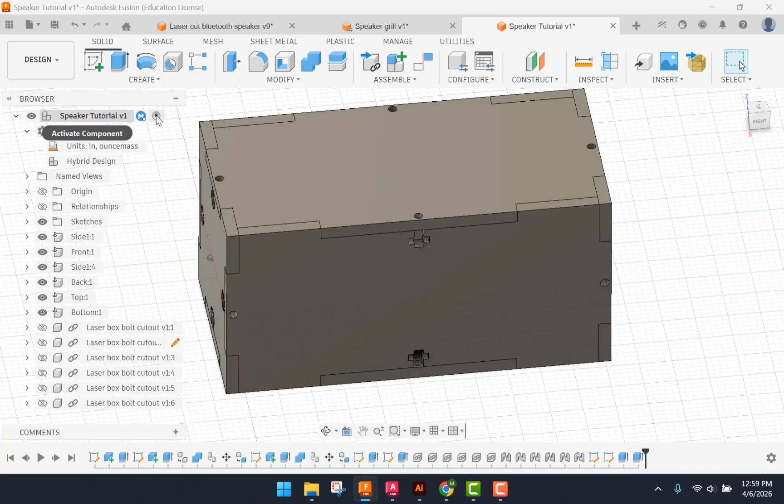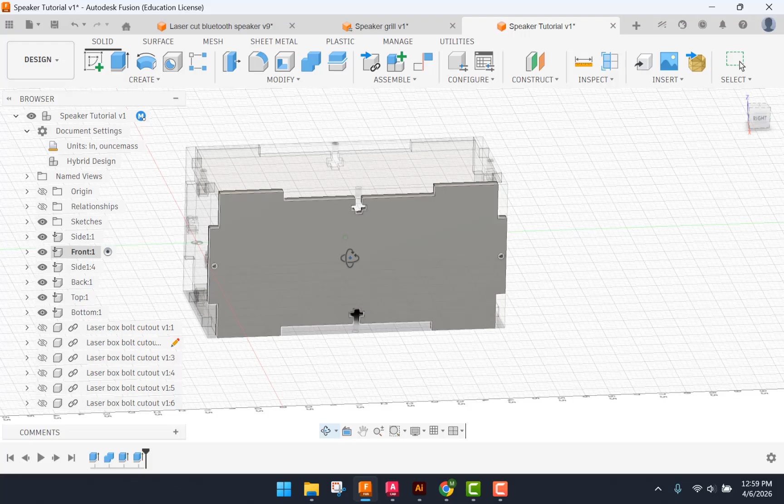One thing you want to know how to do for sure is how to activate one component and how to go back to the main component. There will be these dots here on the side of any of your components. If you want to work just in that one, I would recommend opening or activating that component. Once you're done, go back up here to reactivate the main file.

First thing I want to do is on the front, start a sketch. I'm going to do the circle and the hole cutout for the speaker.

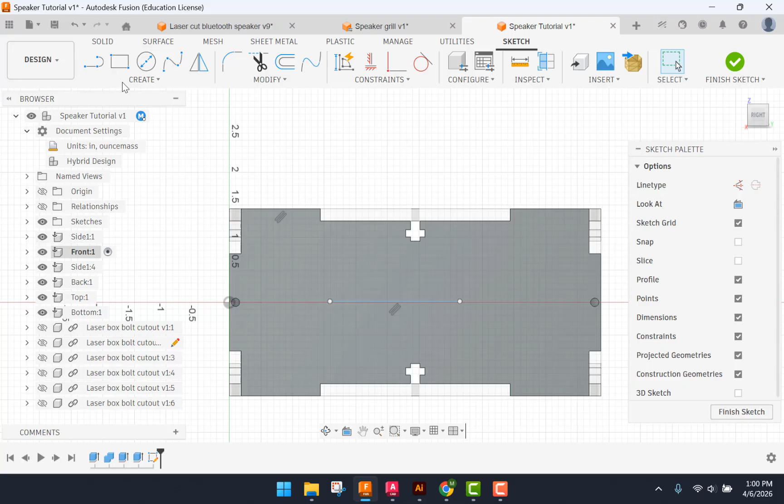To start, I'll go ahead and put a line across the middle, and I will put a line from the midpoint to the midpoint of that line. If I make this line vertical, it should make it so that this line is symmetrical about the middle. That's why I did that.

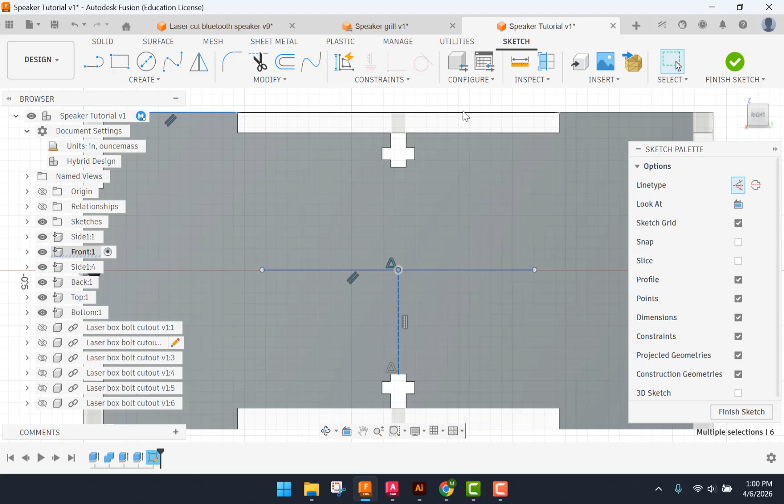I'll go ahead and make both of these construction lines because I don't need these lines, I just want to use that to place my other parts. I also use a horizontal vertical constraint to match that to that hole, so now that's right in the middle.

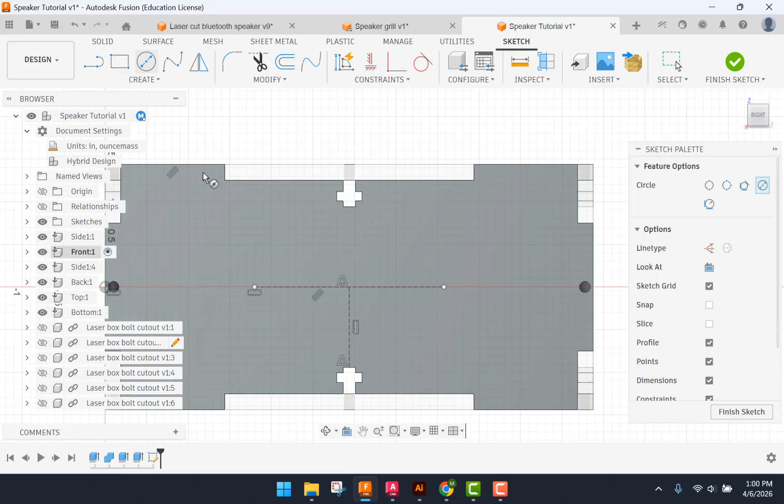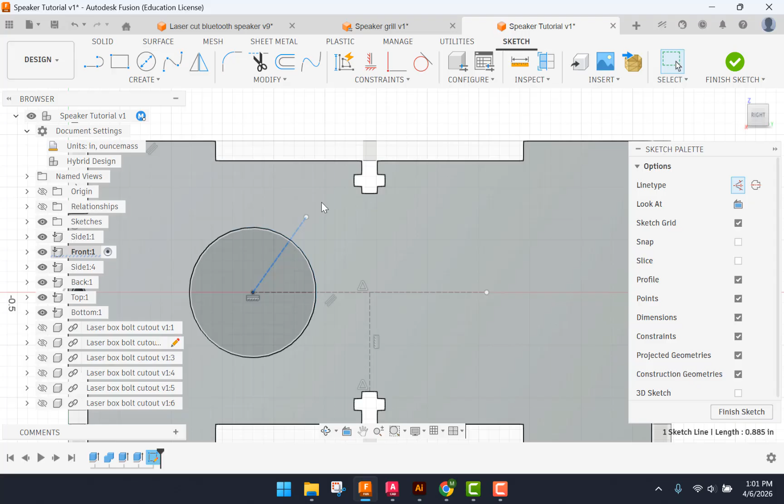And I'm going to put two circles. Actually, I'm just going to do one, scratch that, just one circle. I'm going to go ahead and put a line off to the side, make that dashed as well, of course I'm just hitting X when I do that. So what I'm doing here...

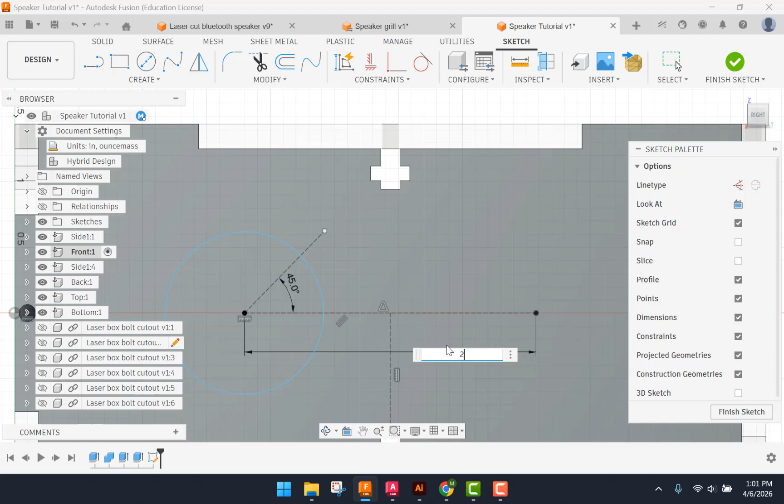I'm going to add my dimensions to it. I'm going to make this a 45-degree dimension. I'm going to make this here 2.727. Make this here 2 inch.

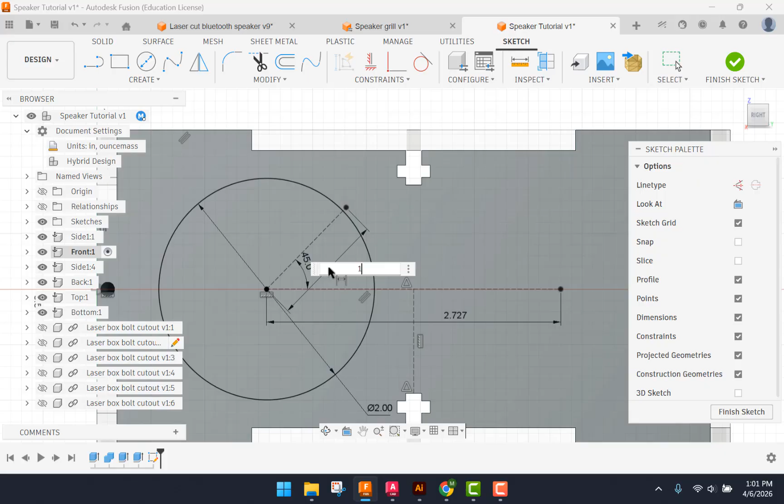This line here, make sure you don't go all the way up or down, make sure it's like this. That one should be 1.189.

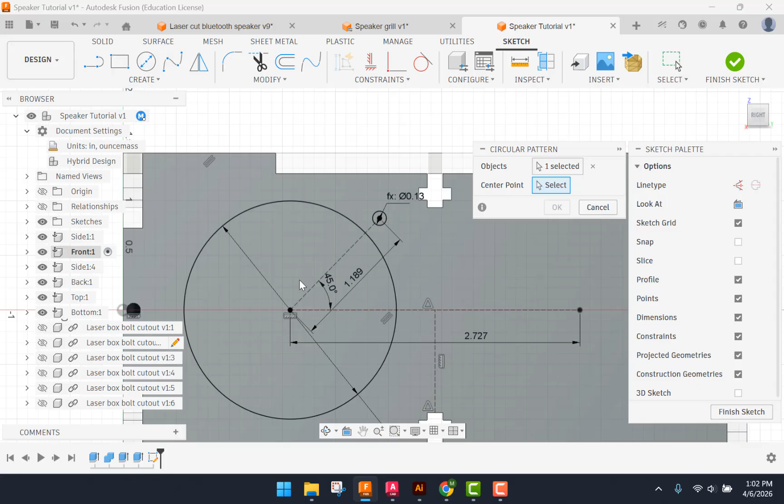Alright, so with that, I can add a circle on the end of this. This circle should be diameter 0.13. Now what I want to do is pattern this circle around this center point and just make sure there's 4 so they're evenly spaced. Go ahead and hit OK.

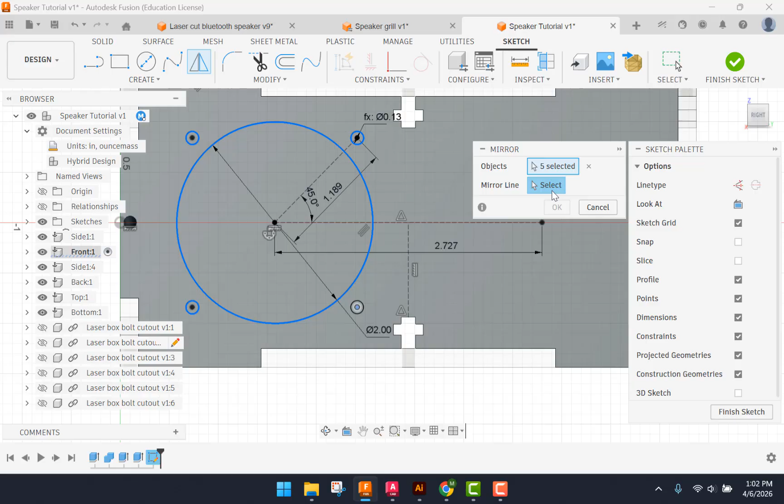Now basically what I want to do is mirror this and these circles, and use this as my mirror line. Make sure when you select the object, you select the circle and not just a dot. There we go, then you can hit OK.

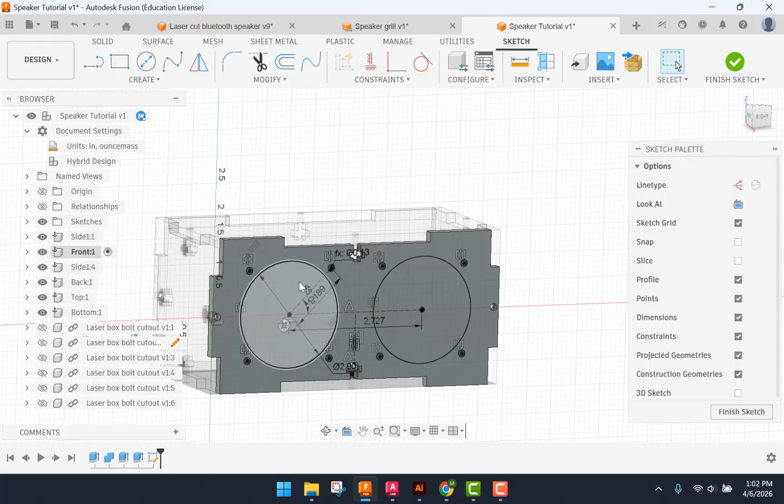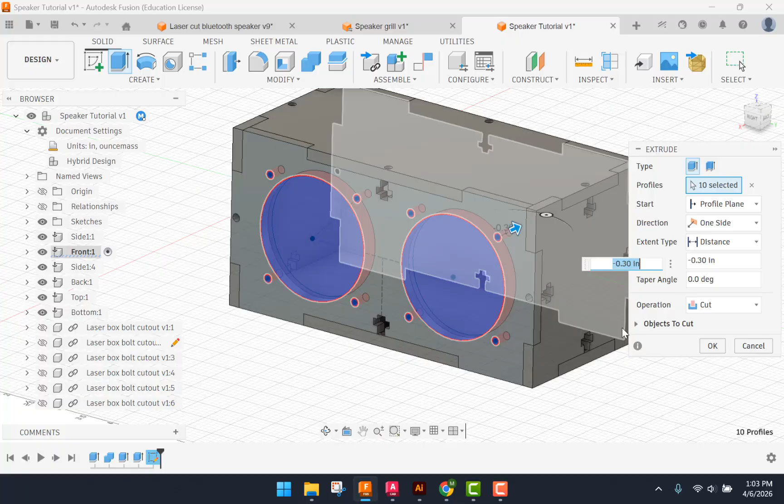So this should be good for the front. I can finish this sketch and extrude all of these to cut. You can go all the way through, just make sure you're only cutting one object. But because we're only in this component, it should only be cutting one object. So with that good, I can go back into my main component here.

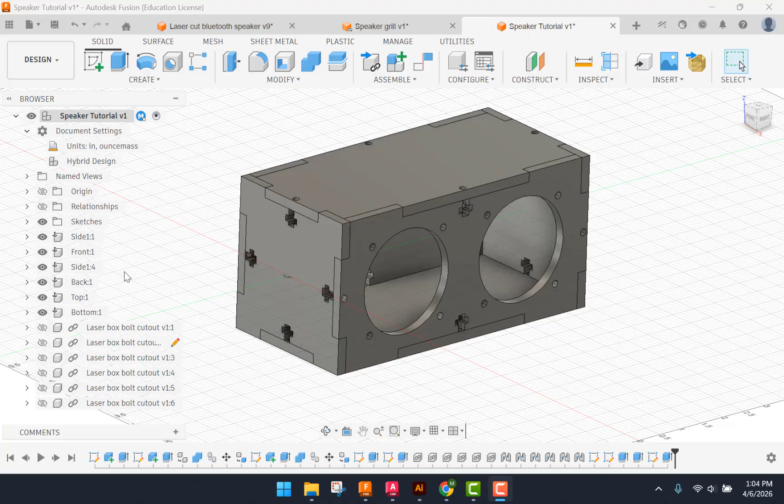Alright, next I'm going to go to the back. And all I have to draw on the back is this little T-shaped cutout for the charger port. So I'm going to go ahead and just kind of draw it as like an upside down T, or like a little hat.

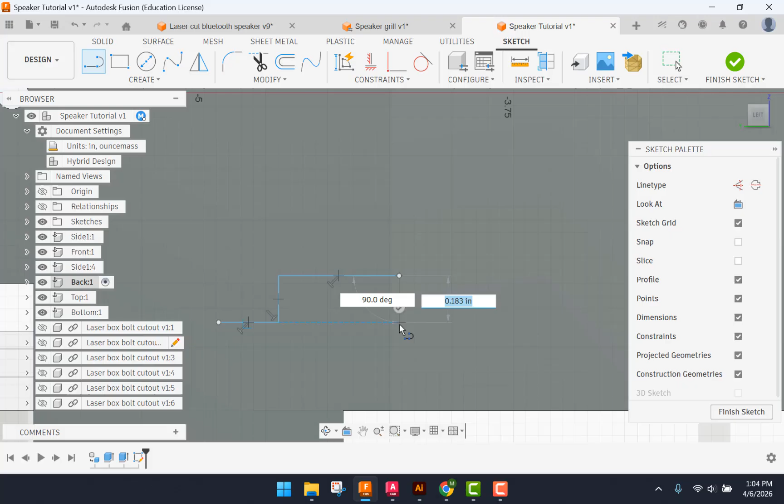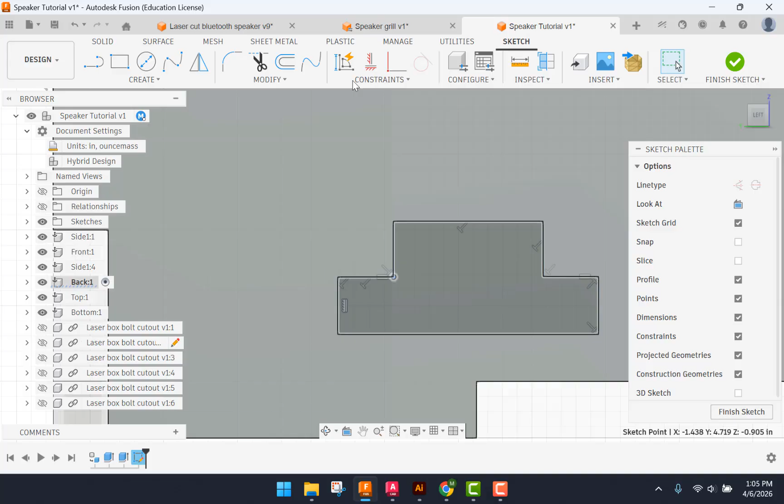I'm just going to try not to... forgot a line there. Make sure you're all matched up, and if you have anything not vertical or horizontal, make sure you correct it. So what I'll do here real quick is just put an equal. I'll make these equal, and I want to make these two equal also. If I do this, make those equal, then it should keep the same relation.

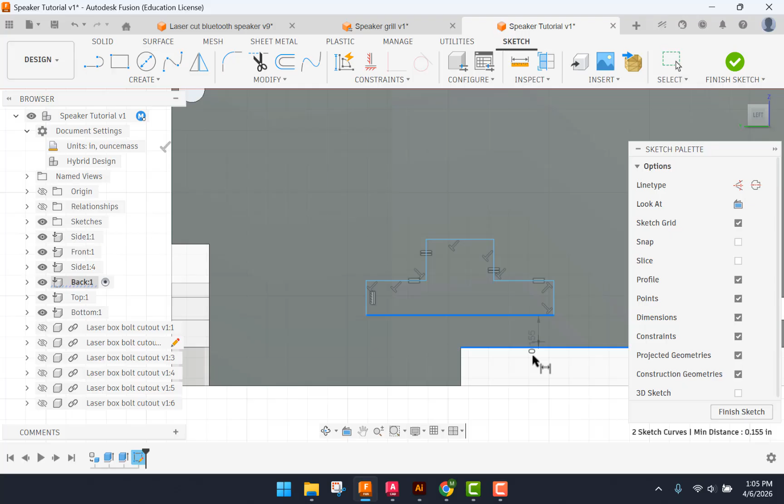There we go. So to fully dimension this, I'm going to dimension from here to this one, not the full bottom, but the one closest to it. So try to draw it in this relative location.

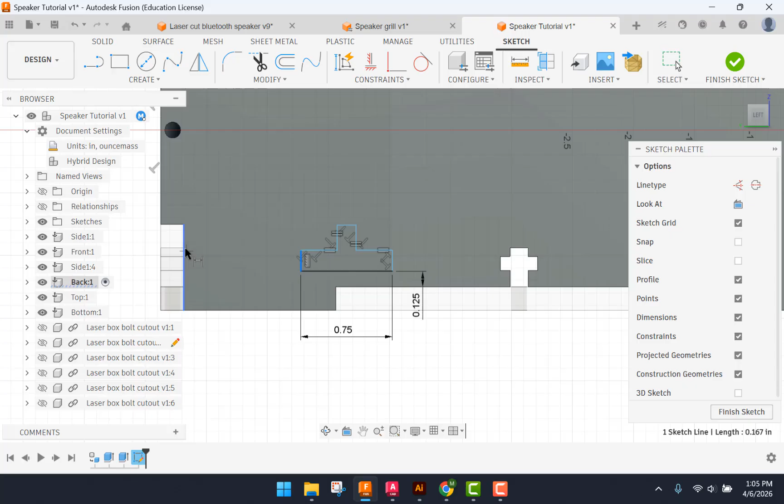This one's going to be 0.125. This is going to be 0.75, just the distance itself. And the distance from the edge should be 1. Again, make sure you choose the right sides on all this.

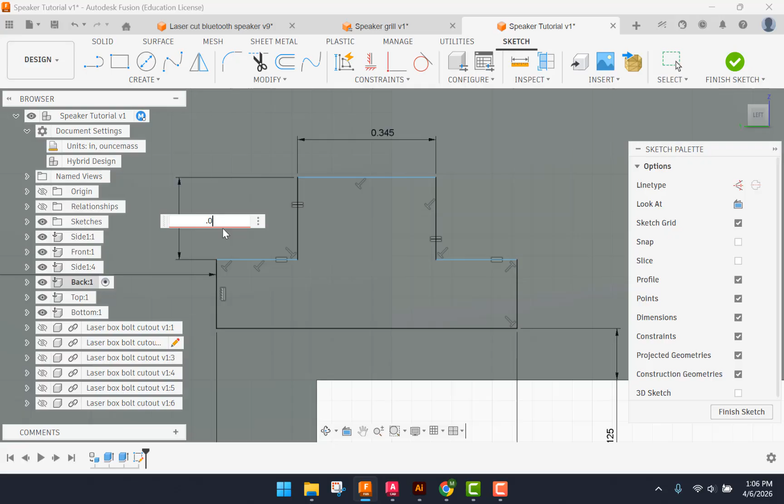The top here is going to be 0.345, and since we set everything equal, these should change as well. So now all I have to do is dimension the top here, 0.096, and dimension this bottom one to 0.069.

Now that that's fully constrained, I can extrude it and complete this piece.

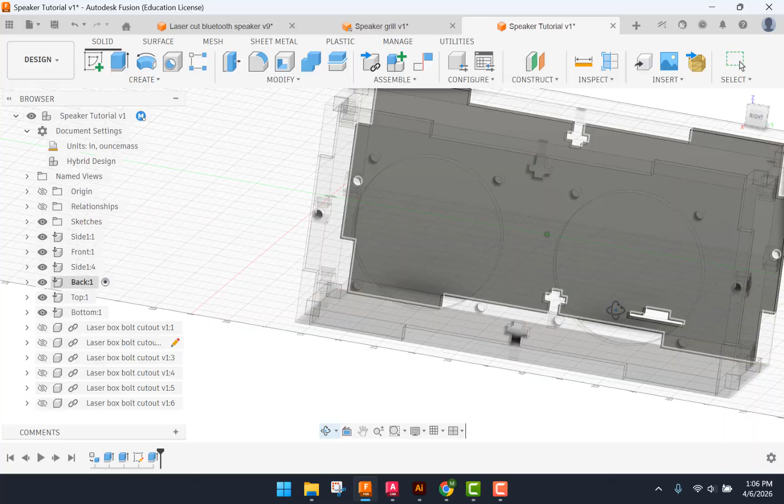I'll go back into my main component here. All right, next thing is to do the same thing for the top, so I'm going to activate the top. Just make sure we're putting everything in the same relative locations here.

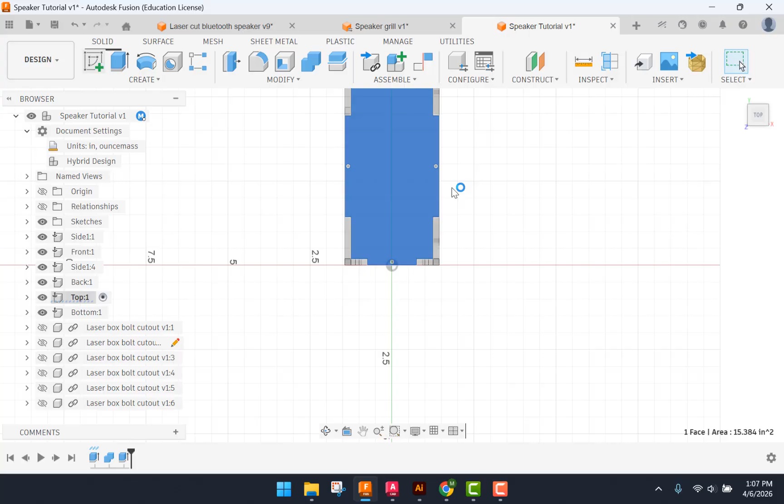So this one, I'm only going to draw a rectangle and a circle. The exact placement is not super critical on this one, but our dimensions are. So this one's going to be your hole diameter.

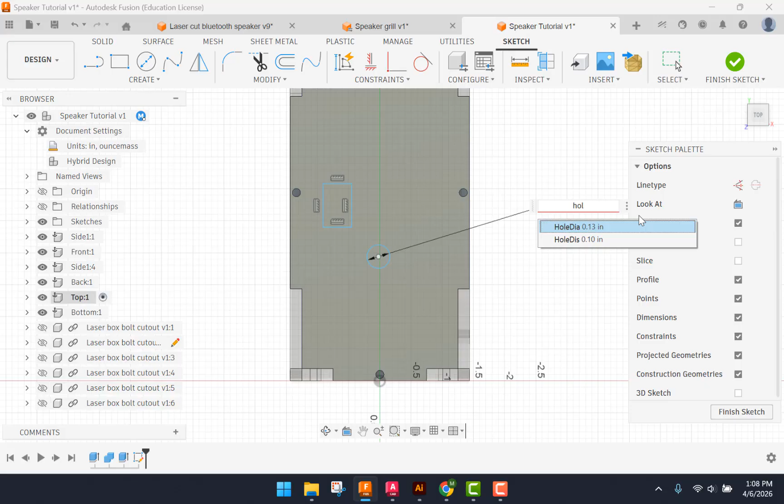This one here, the long side, this is going to be where your switch goes, so it's up to you where to put it. I like to put it in this direction and towards the back, so that way it does not have a chance of interfering with the speaker. So here I'll go 0.486.

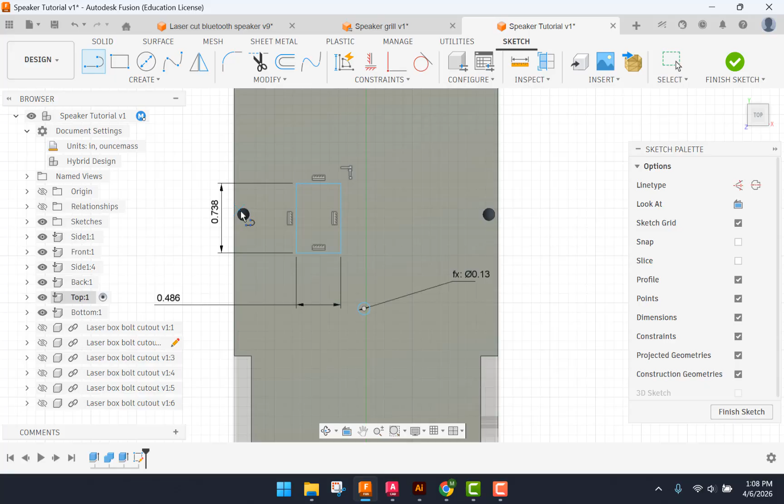So where exactly they go, I don't know. I'm just going to put a line from the midpoint here to the midpoint here. And if I make this horizontal, it'll bring that up like this. And I'll just put it here.

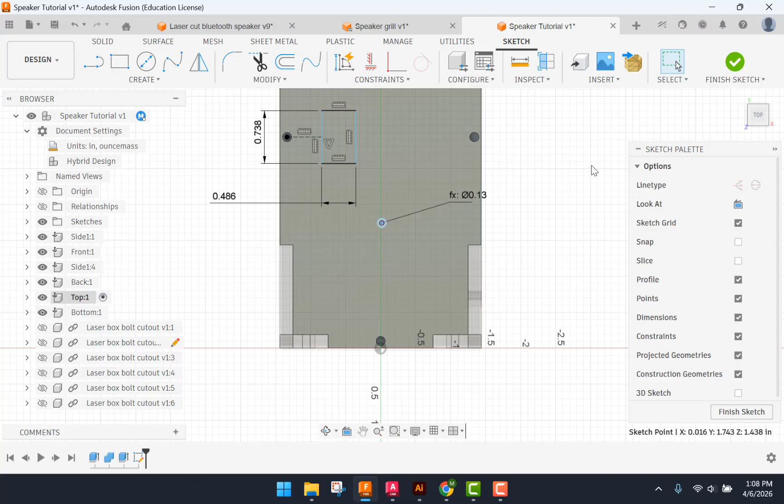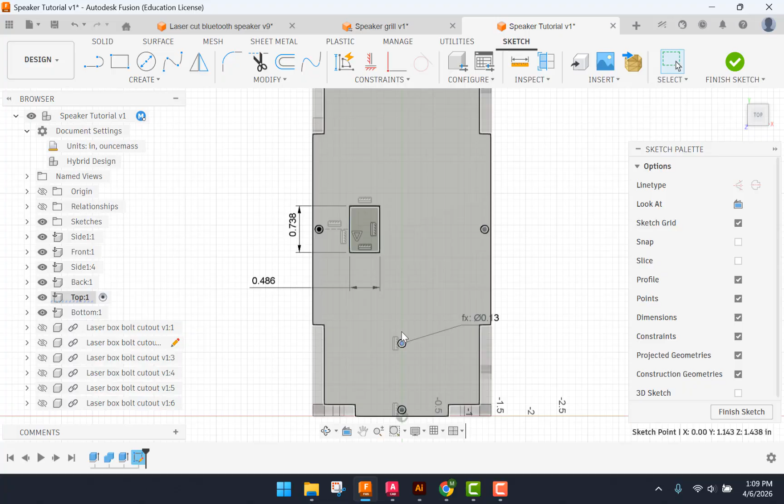Same thing with this. I want this one to be horizontal, vertical with the origin line, so I'll keep it a little bit of distance away. Exact placement, not important. This is where your Bluetooth chip goes and your switch goes, so make sure they're not right next to each other. Otherwise, your soldering will become kind of a pain.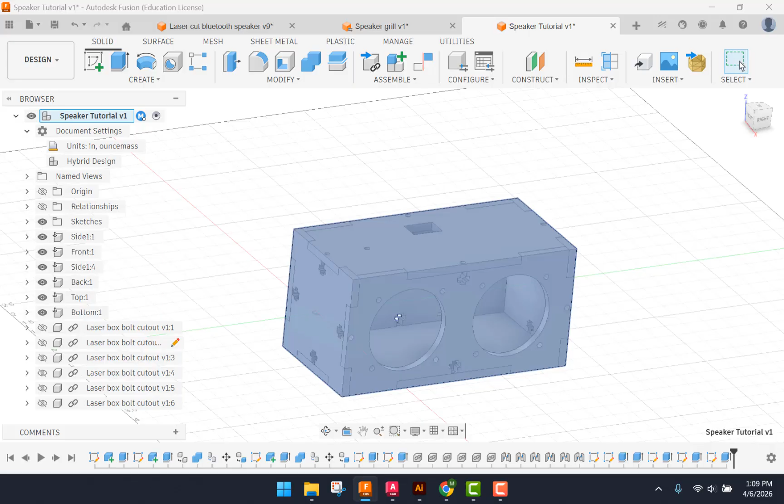Same thing, extrude this, extrude that all the way. Then we can go back into our main component. All right, last one is the bottom, so do the same thing.

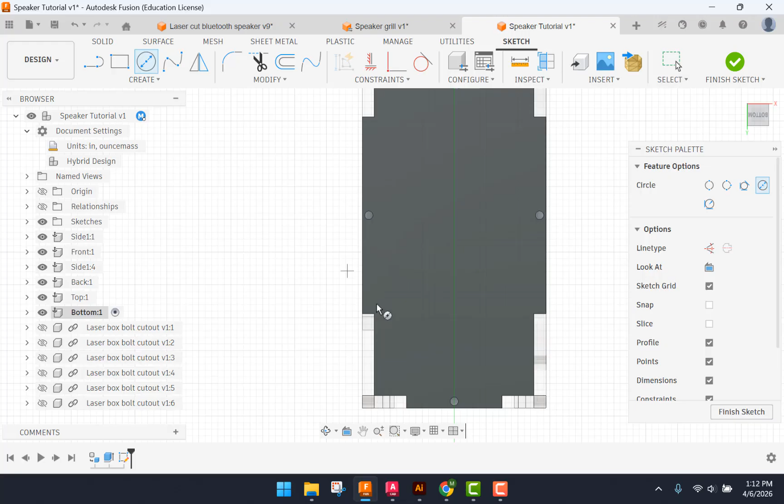So for this one, the main thing, we just got to make sure we're sketching these two holes around this one. So I'm going to sketch two holes here. I'm going to set their dimension to hole diameter.

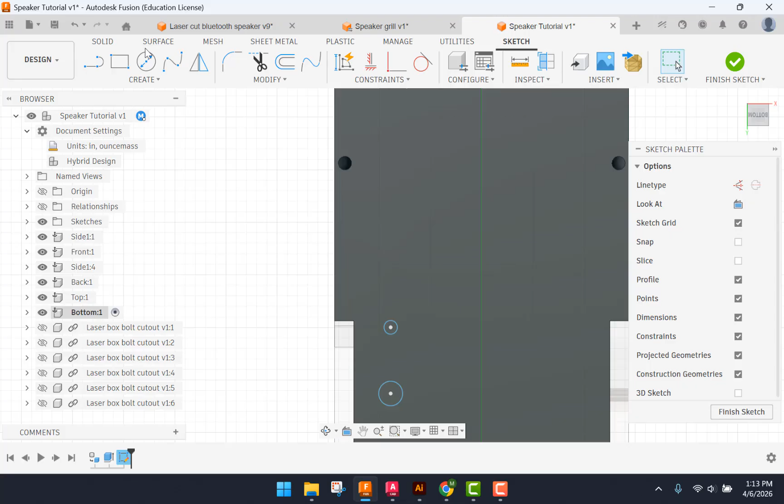Sorry, no. These are actually going to be hole distance. I'm just going to type in 0.1 for both of these. Make sure that they're in line with each other using the horizontal vertical. And what I'm going to do is put some

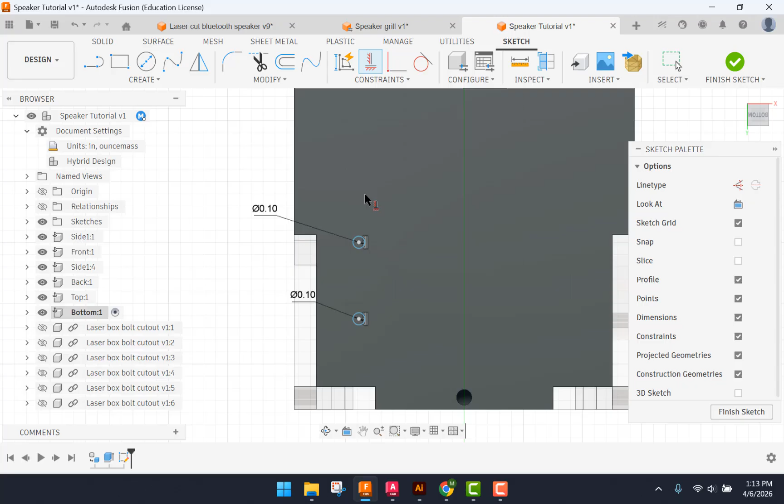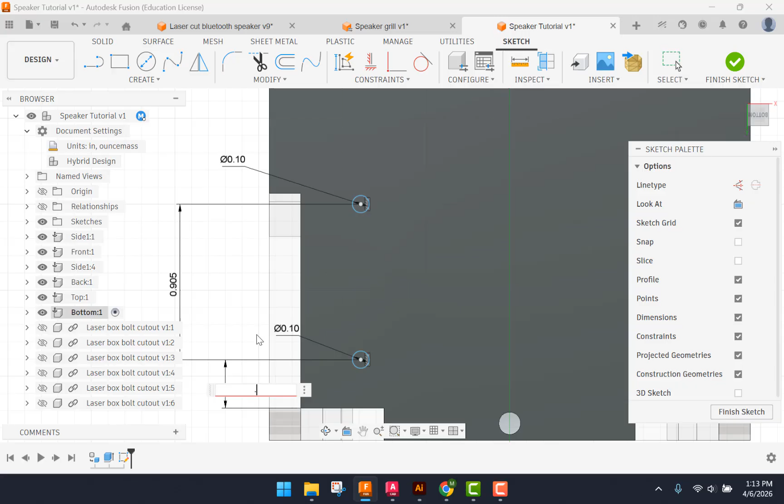dimensions between them of 0.905. I'm going to put a dimension between this and this closest edge, 0.922. And then from this edge to the closest edge here, 0.35.

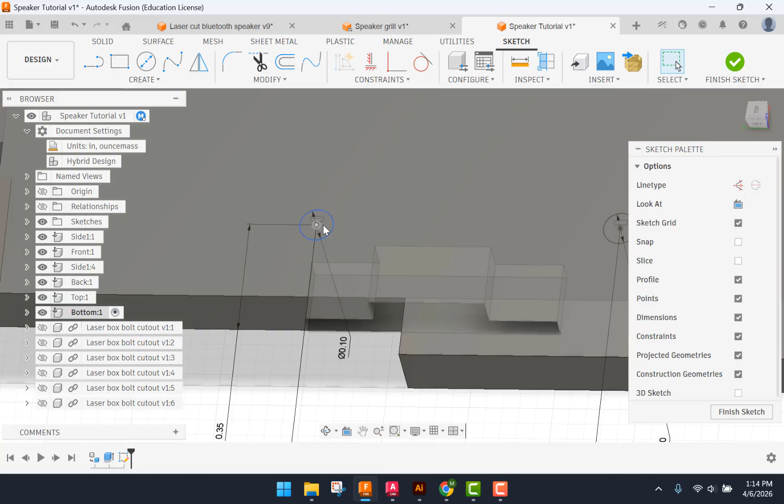So make sure we have it so it's lined up near this. And these are going to be smaller holes because the screws need to bite into the wood as opposed to having the bolts on the end of it. So those are in the right spot, and I'm just going to go ahead and put a single hole dead center.

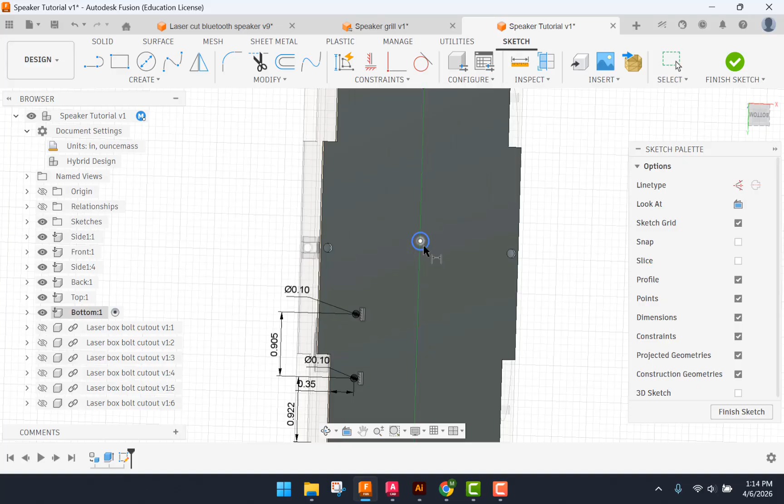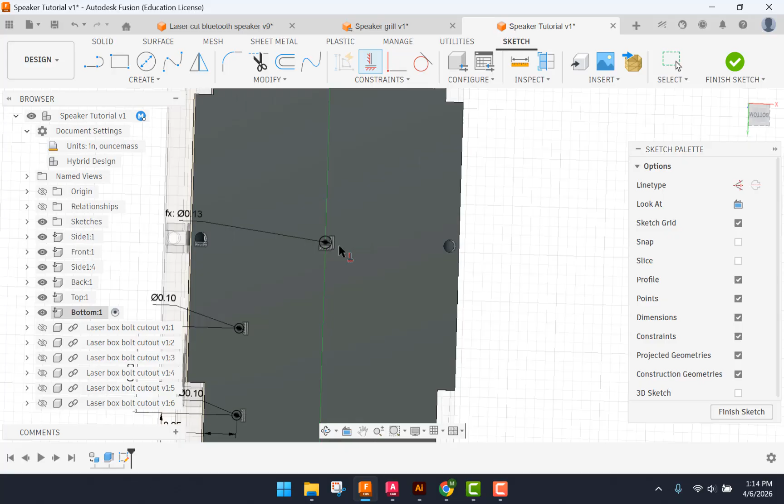This one is going to be hole diameter. And to get it dead center, I'm just going to use the horizontal vertical and select these hole center points to line them up to get it right in the middle. That's where the battery is going to be attached to the base.

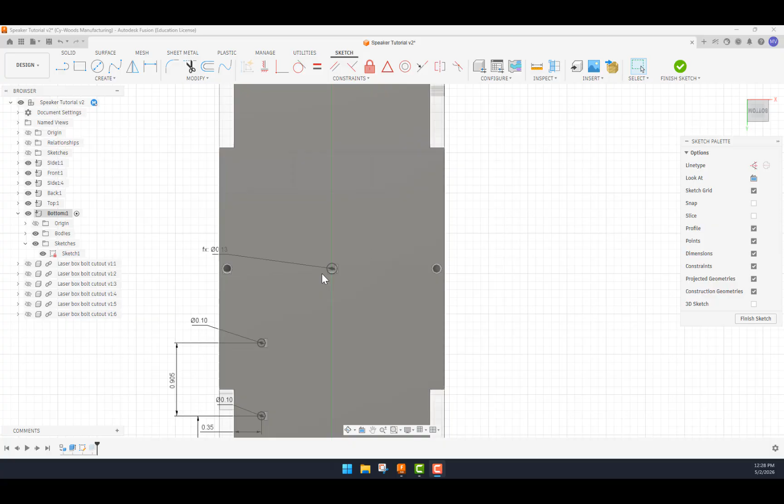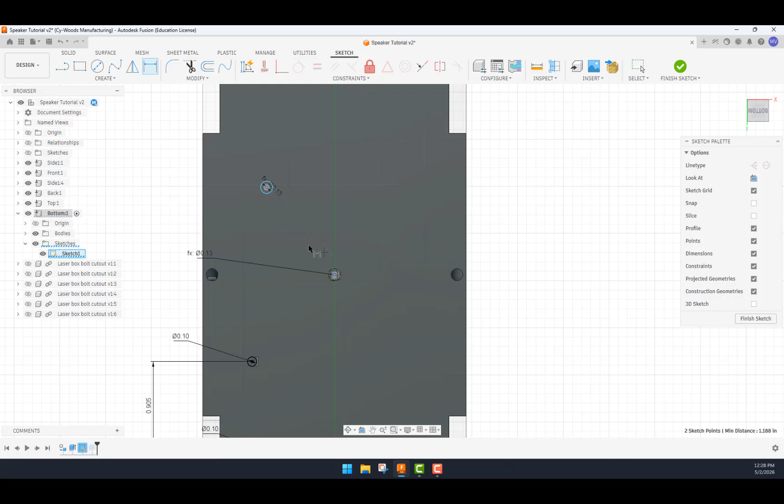All right, so this hole actually needs to be shifted over a little bit to the side so it does not interfere with the speakers. So actually this hole, I'll leave this here as reference, but I'll make it a construction line by hitting X. And then what I will do is I will put another hole of the same size, so hole diameter, and I'm going to put that 7/8 this way. So from the center line, I'm going to go 7/8 in this direction.

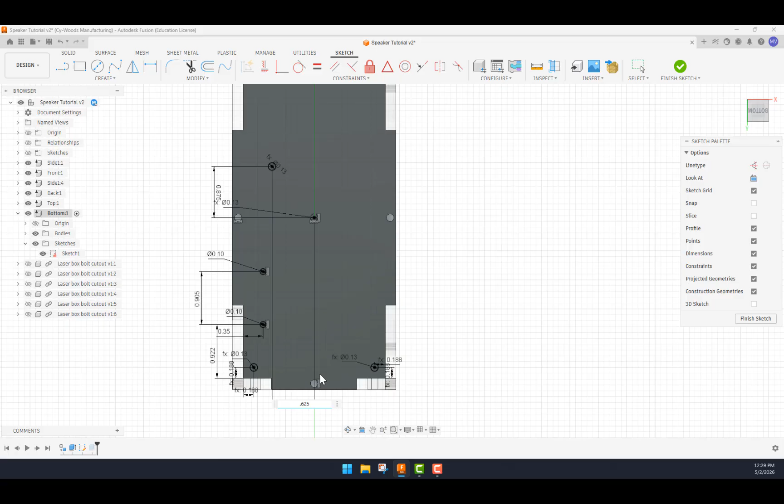That is 0.875. And I'm going to go 5/8 in this direction. So it's kind of hard to see, but I'll put it down here. 5/8, which is 0.625. So I want it to be on the same side as these holes, but on the other side of the center. And that should be the hole location for the battery.

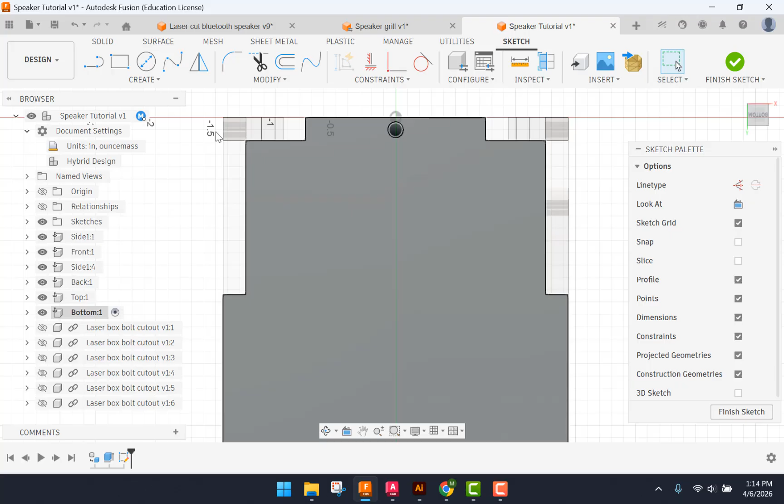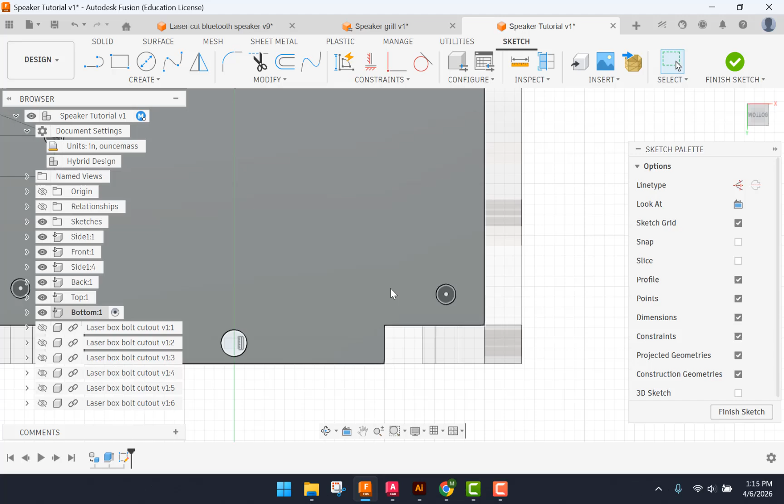So last thing, I'm going to put another small hole. So this one is going to be 0.1 on all four corners for the feet, if you'd like to include them. So I will set the dimension here from the edge of, just to make it easy, I'll use ply on both. And set this as hole diameter.

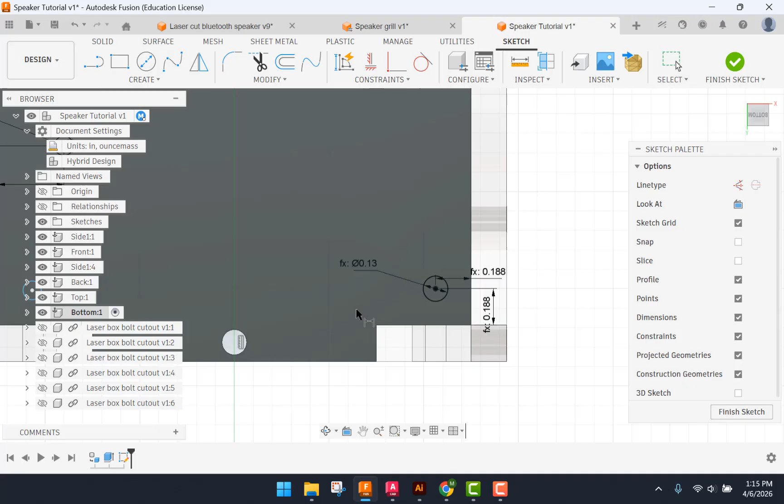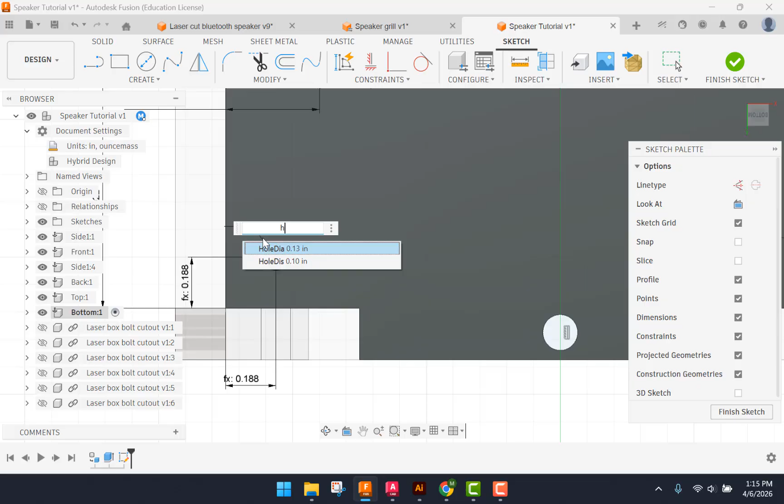So the size of this hole depends on whether or not we want to use the threads to attach it or not. I think not using it is probably easier here, so I'm going to go ahead and set it to this here. But with all of this done, we should be ready to lay this out for our laser.

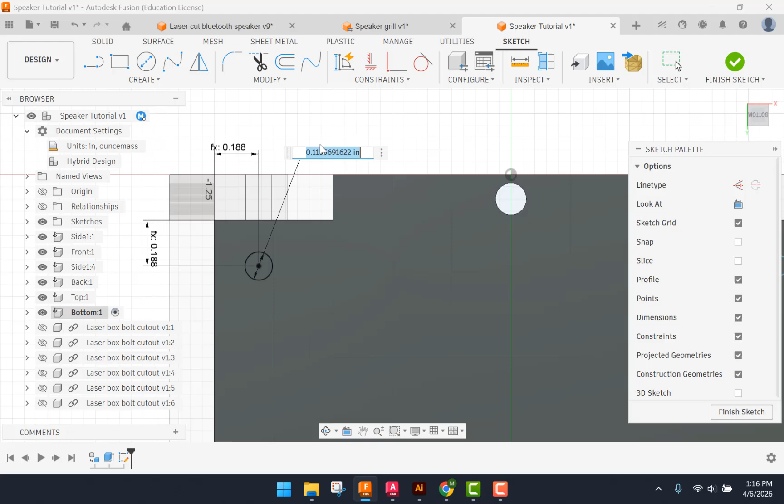I'm just going to finish this up real quick. One last one. Like I said, a lot of repetition, nothing too difficult here.

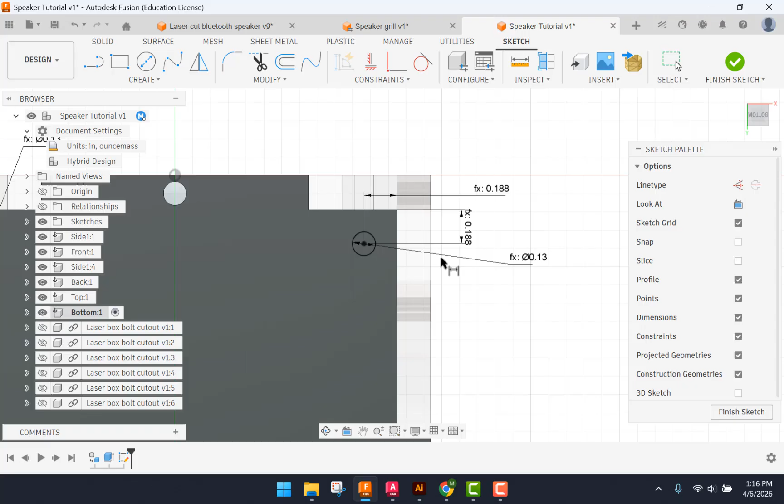So I'm going to extrude everything. Just make sure it goes. Select them all, make sure that the extrusion goes through this way. Hit cut. Make sure all my parts line up.

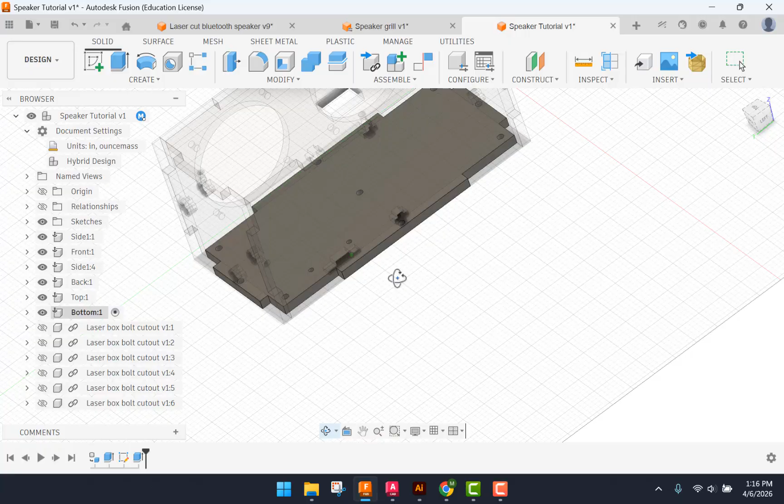I want to make sure that the switch is away from the front. I want to make sure that this hole lines up with this slot back here. So with all this done, all my designing is done. I just need to lay out the parts for the laser.